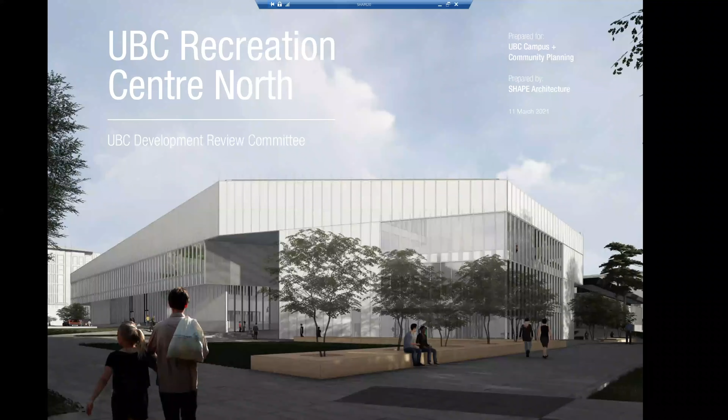Just a quick agenda. We'll touch on the introduction with the project scope, and then we'll talk about the urban design conditions that we considered for this project and get into the building design following that.

This project is located at basically the end of Student Union Boulevard, just north of the existing Life building and to the east of the Bosque.

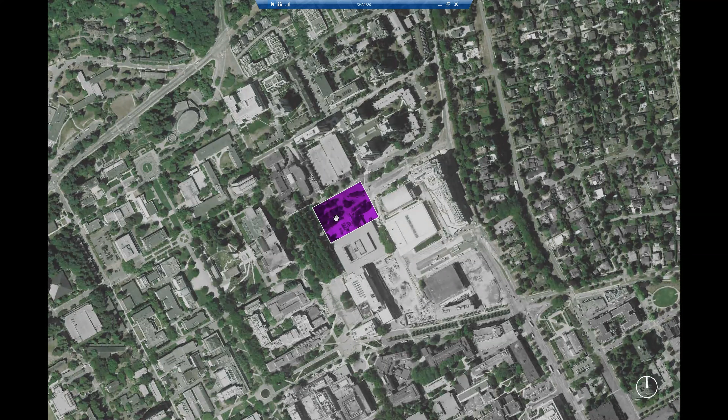The facility itself is about 9,400 square meters, or just over 100,000 square feet. It's largely a fitness facility, with 3 gymnasia, a large fitness component, walking and running track, multi-purpose rooms, change rooms, and some associated administration space.

There is a public realm component that's somewhat related to this project to the north of the building itself. For this project and development permit submission, the scope boundary is basically about 6 meters outside of the building itself, extending all the way to the south to the face of UBC Life.

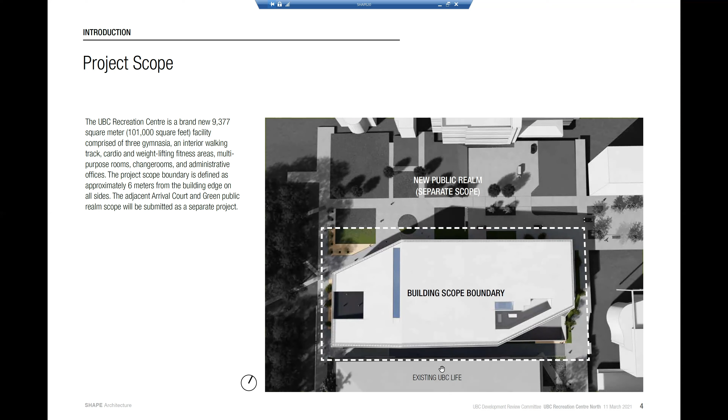Some of the first core principles of the project: we looked at the existing urban context, considering Student Union Boulevard coming down, and there was a predefined street wall created by the Exchange building to the east.

So the massing of the project takes reference from that and continues that street edge down to the public realm area. From the west, we took the west edge of the Life building that faces the Bosque as our western extent.

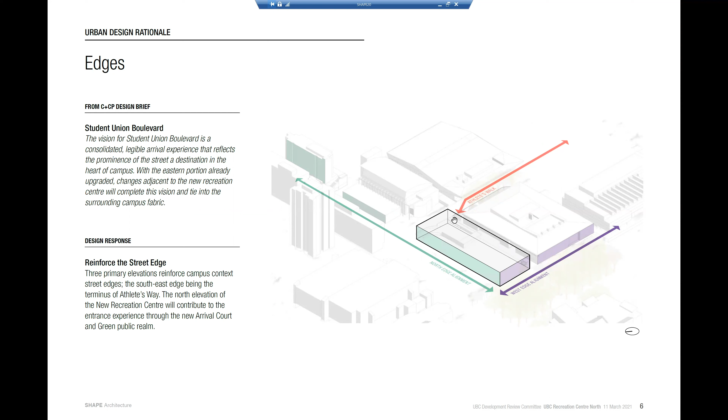This project also considers its interface to Athletes Way along the eastern edge.

Another key thoroughfare and consideration for this project was the existing student services spine that runs through the existing Nest building and the Life building, and currently ends quite abruptly at that northern edge of Life building. This project strives to carry through that alignment into the north public realm area, while mediating the 2 levels of Life that face onto the north edge.

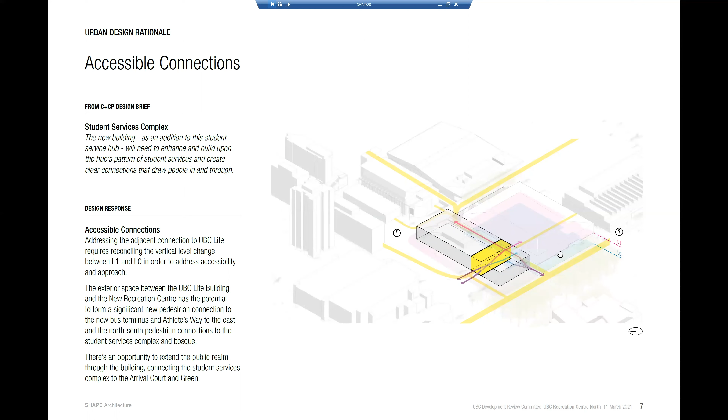With the intent of carrying through that spine all the way to the north, we created a sloped exterior walkway that basically bisects the building mass into two.

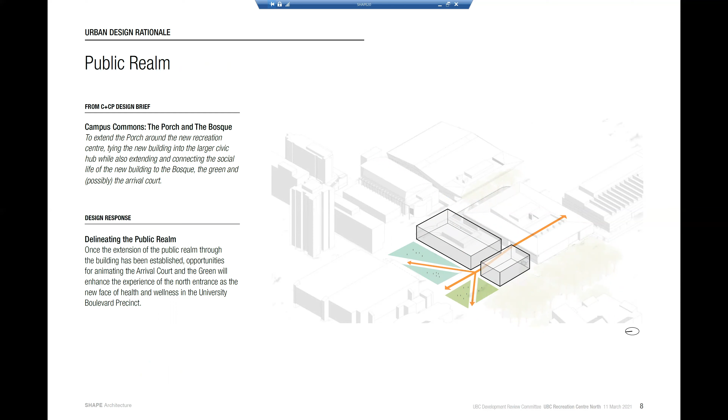Considering the solar access to the northern public realm, pushing down the western edge of the building and in the northwest corner allowed greater access there, as well as considering how the building mass can open up and become more inviting to that Athletes Way interface on the east side.

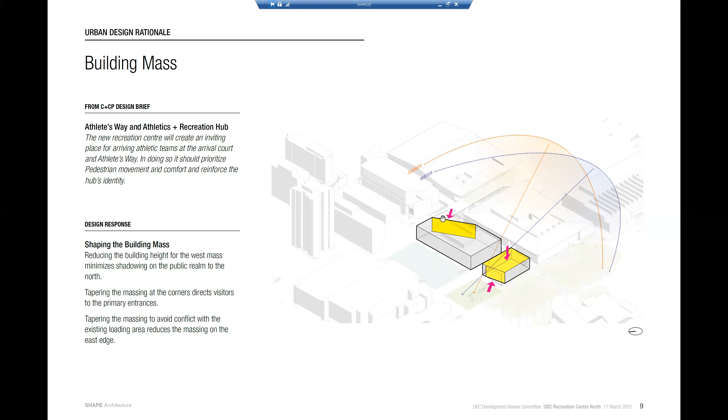And then a shared podium that connects the two, with a main atrium space, change rooms, and the admin space.

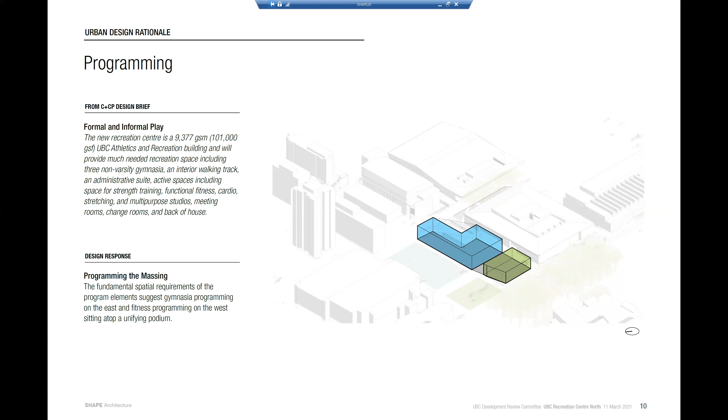We'll go through 3 context sections, starting with the building looking along Student Union Boulevard to the south, showing the existing Exchange building, then the SRC, the Athletes Way connection and its proportions, and then the rec building itself with the Bosque to the west.

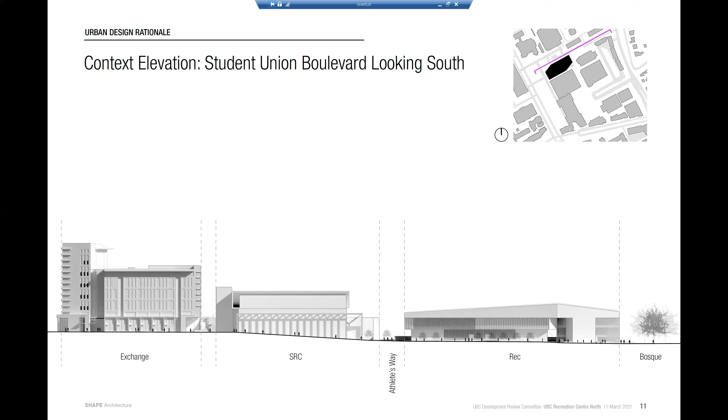This one is looking along Athletes Way to the west. You can see the Nest building and then the Life building, what we're calling the Recreation Gallery, or the space between the existing Life building and UBC Rec.

And then the public realm space to the north. You can see how the buildings really define that exterior public space.

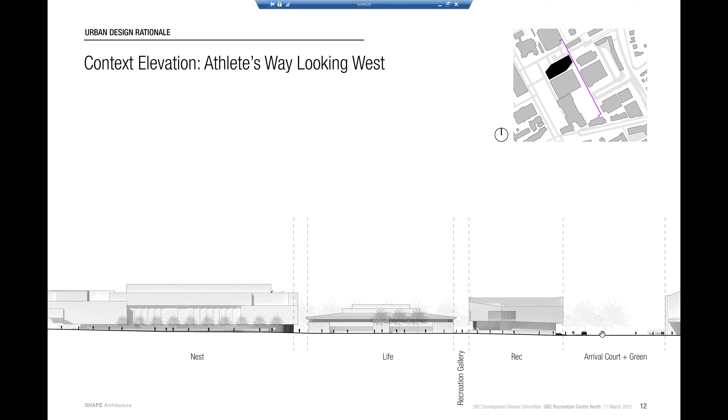This one is looking along the Bosque to the east, with the public realm on the left-hand side, then the rec building with quite a significant amount of glazing facing the Bosque, and then the recreation gallery in that space there.

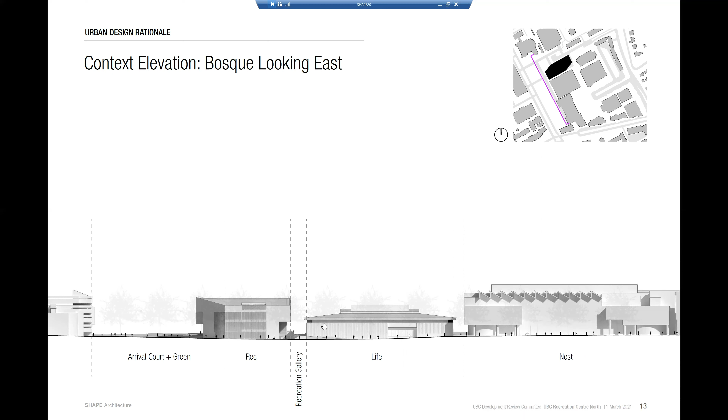Just a site plan. The primary access for the building is the north entrance here.

Pragmatically, that would be the firefighter access with a 15-meter access route from the fire truck access coming around in the roundabout arrival court area, and then extending into the public realm area in an inconspicuous sort of way. It's not really meant to be a prominent feature, but it will be there functionally.

Just a quick note that the existing Life Building firefighter access is currently on the north side of the Life Building, and we're proposing to move that to the east side, with fire truck access along Athletes Way between the rec building, the loading bay, and the student rec center.

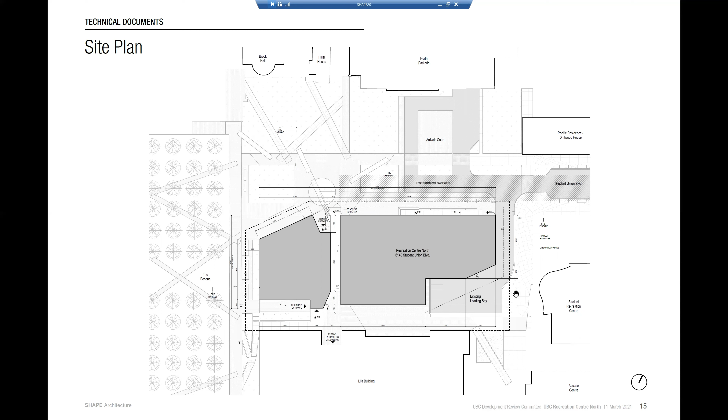So the building height and massing. The top one is an elevation of the north facade that faces the public realm, and then a section running east-west, showing the gymnasia volumes on the left-hand side, the public walkway in the center, and the fitness space to the right-hand side, or the west side.

There was a deliberate forming to the height of the building as it changes from east to west, creating a bit of a foreshortened perspective condition to reduce the perceived height of the building.

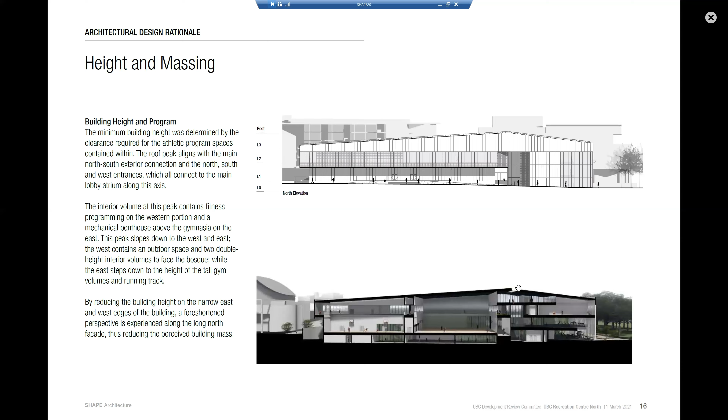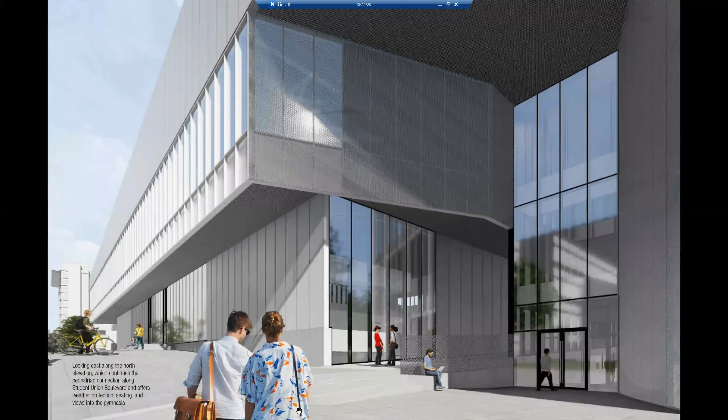This is just a view of the north entrance. We'll show a few renders here around the building, showing the various conditions. This is the public exterior walkway that connects north-south, sloped down to the north public realm. The north entrance here to the right-hand side with that public walkway, and the gyms in the center with the running track above.

And then from level 1 of Life, there's really no accessible connection to that north public area currently. So this building really strived to make those connections through the building, with the building, to that public realm to the north.

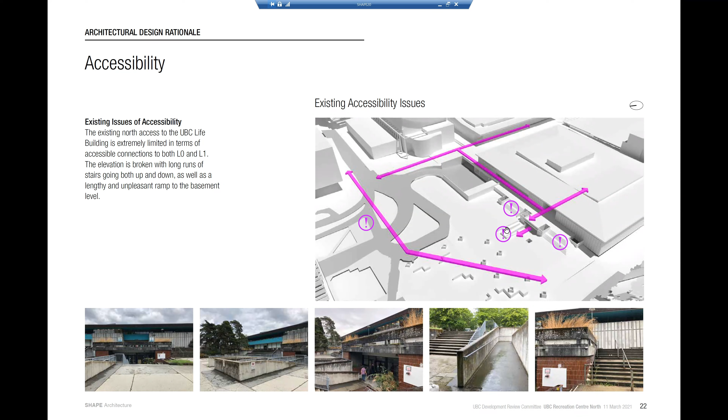So this diagram basically shows that. That exterior walkway condition slopes down at a grade of less than 1 to 20, so less than 5%, so not actually considered a ramp, avoiding all handrails, etc., but sloping down to the north public realm area.

A new entrance from the west, which has a shared vestibule that connects into level 0 of Life and level 0 of Rec. And then also that new west connection from the level 1 Life concourse exterior down to the level of the Bosque on the west.

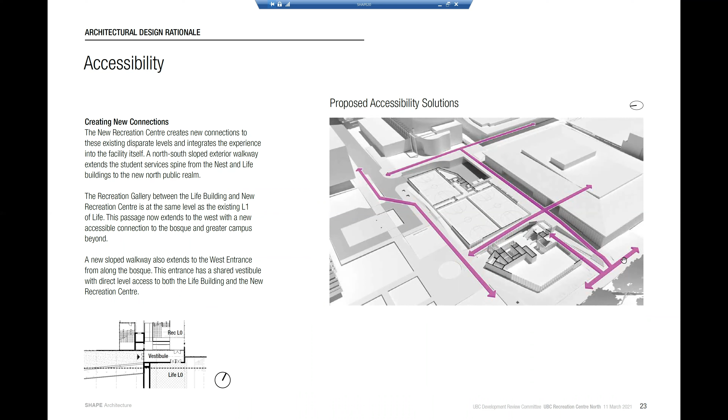So like I've said, the main entrances - there's one on the north, basically directly from the plaza, with a slope down to that entrance. Then an entrance on the south, which is at level 1 of Life and this building, and then a new west connection.

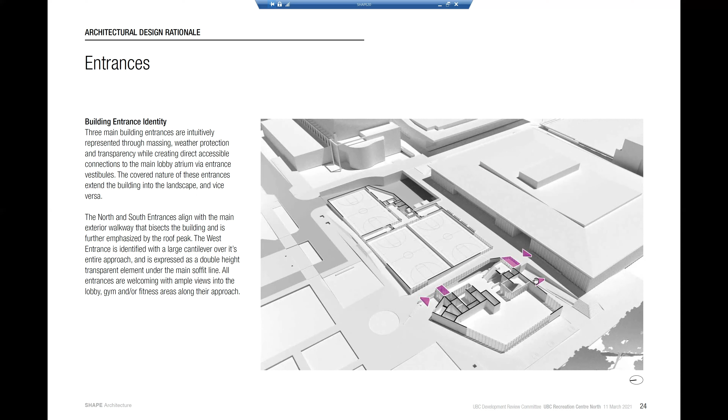Just 3 views of those: on the left-hand side, the new north entrance; the new west entrance on the upper right; and the south entrance on the bottom right.

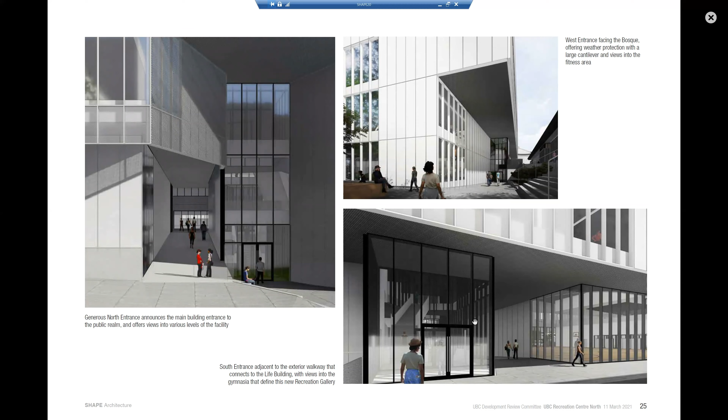So just quickly to walk you through the plans. This is level 0, what we're considering the lower level, and the yellow here aligns with the same level as UBC Life. There's a fitness component on the left-hand side, which is behind control, so you have to walk through gates to get to that.

And then on the right-hand side are the multi-purpose rooms, 2 of those, the change room component, women's and men's, and then back of house on the far right-hand side, which interfaces with the existing loading bay that services the Nest building, as well as the Life building.

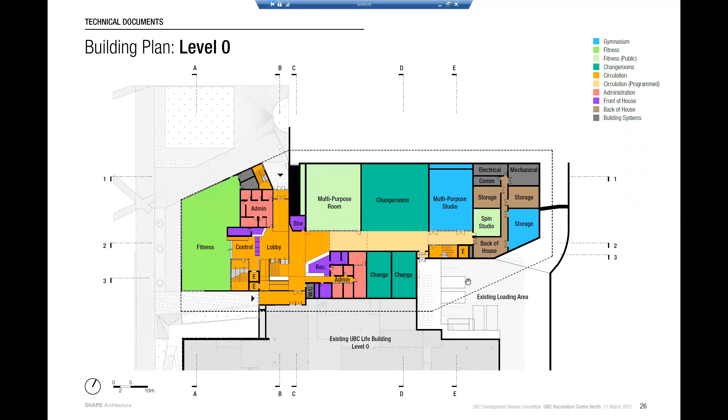And up to level 1. This level shows, this is basically at the level of the existing Life concourse, which slopes down to the north with that exterior walkway. You can see the entrance on the south entrance, to a landing with an elevator that can take you down to level 0, as well as stairs that go down to level 0, and a stair that goes up to level 2, which is the walking track.

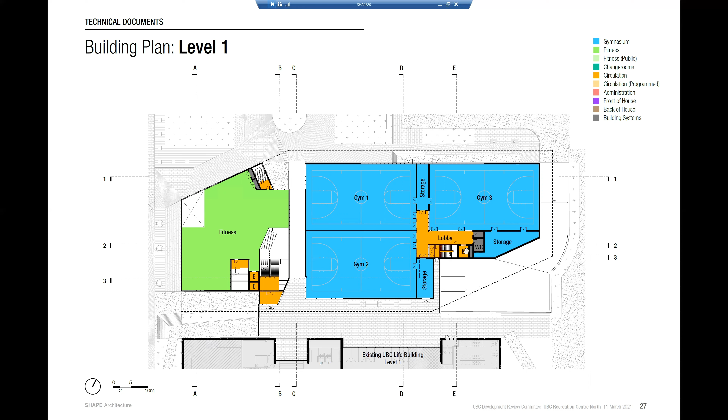And just quickly here, on the right-hand side, a gym lobby that services all 3 gymnasia with an elevator and stairs to access that, and fitness on the left-hand side.

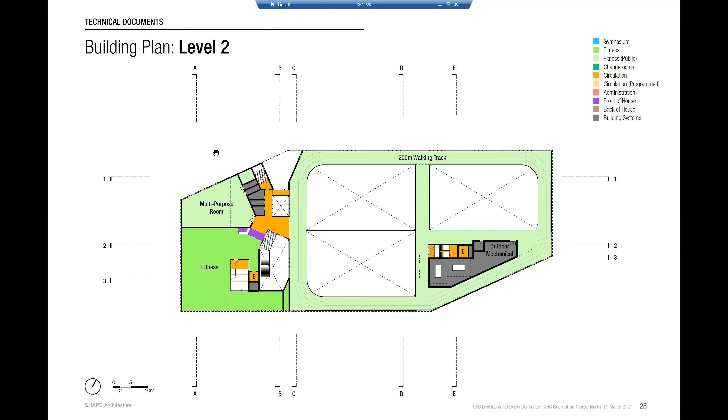This level 2, so a 200-meter walking track wrapping around the gymnasia with exterior mechanical there. The stair and elevator continue to carry up, and then that stair from the south entrance carries up to fitness and another multi-purpose room that faces out to the north Bosque and public realm area.

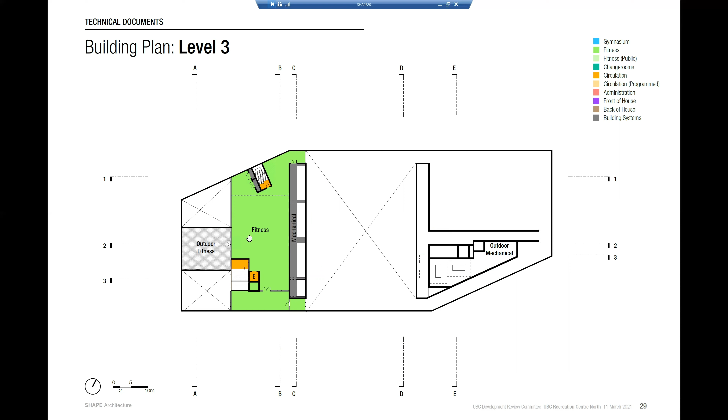And then finally, level 3 on the west side is more fitness space, some mechanical, and a component of exterior fitness space.

Okay, so the public realm, or the public spaces of the building, are basically able to be accessed by anyone. They're not behind control. So this was the running track space, the gymnasia, as well as the complete lobby atrium space, shown in magenta or pink here.

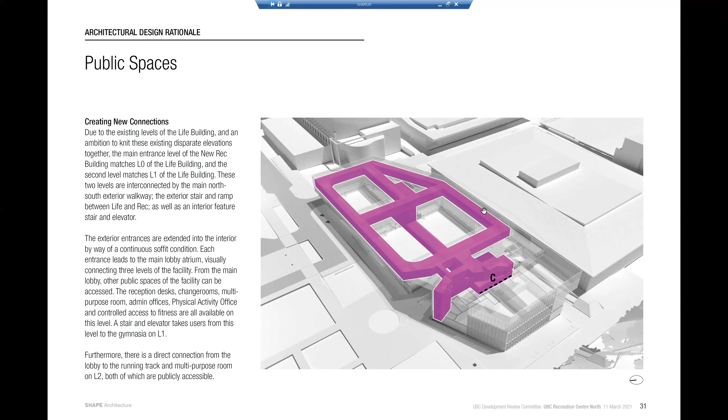So this is a view from the south entrance. Just as you come through the vestibule, you can look on the left-hand side, the stair going up to the running track level, and then the stair going down on the right-hand side to the main lobby space. So there is this kind of main, basically 3-story lobby atrium that provides views to all the different levels and program, as well as, on the right-hand side, views from the exterior walkway looking down into that space. So lots of visual connections throughout the project.

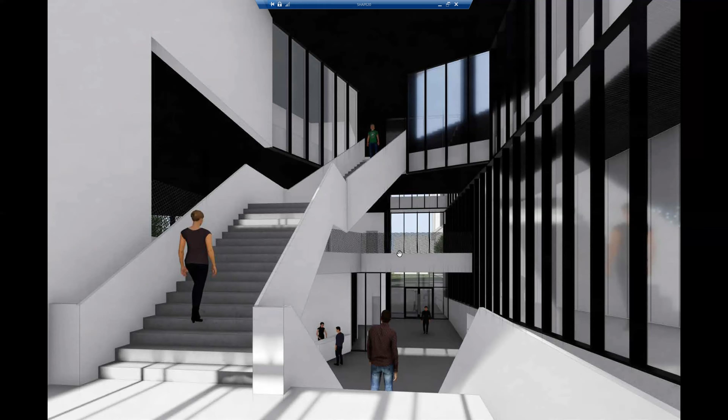We tried to strategically place glazing, particularly on the ground floor level, to not only provide connections from the exterior looking in and creating a relationship to the fitness and gymnasia components there, but also views out from the facility to the public realm to create that passive surveillance and address some of the CPTED issues around the site. Strategically placing those to ensure that most areas are covered with that visible connection.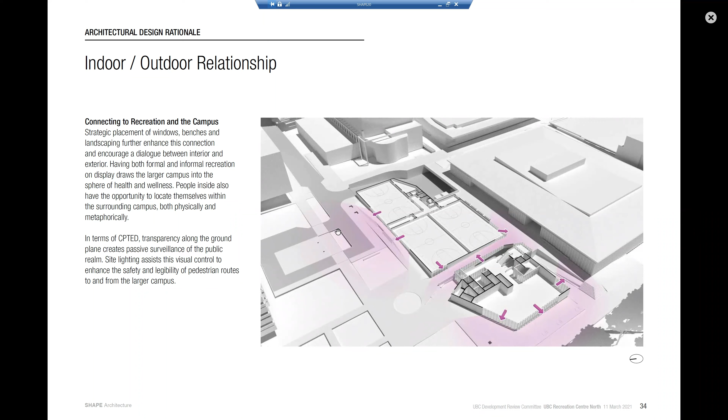Just one example of that is looking from level 0 of the fitness space to the northwest out to the Bosque. And that's one area we've used a double height space to really reinforce that connection to the exterior.

Another key idea was utilizing the overhang or cantilever of the running track to provide weather protection, continuous weather protection along the full north edge and on the south edge. And then also utilizing a portion of the fitness space to cantilever over the west entrance to provide weather protection there and create kind of open, inviting massing for that entrance.

And just a view of that along the north entrance with that covered area. And the north entrance as well being quite generously covered for weather protection.

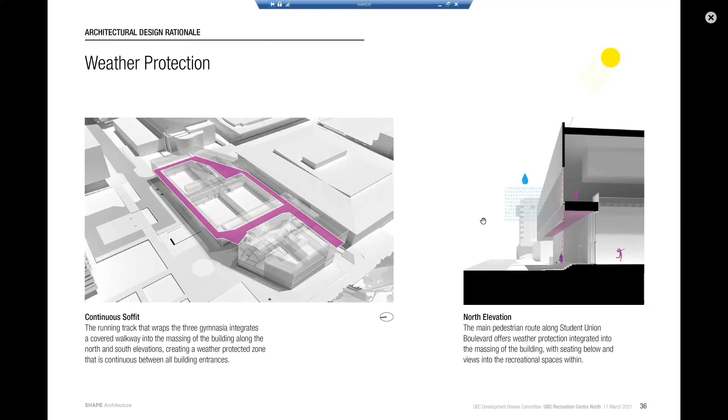And then considering solar access, both to the recreation gallery, the space between life and rec, we really carefully studied the proportion of that space, the dimensions across, as well as the materiality of the cladding in that area, and a number of other things we'll touch on a little later.

And then considering the building mass and how it shadows the north public realm area. So really shaping that mass, pushing back that northwest corner, as well as down to reduce the height on that side, and allow maximal sun to the public realm area, this area here that faces the Bosque.

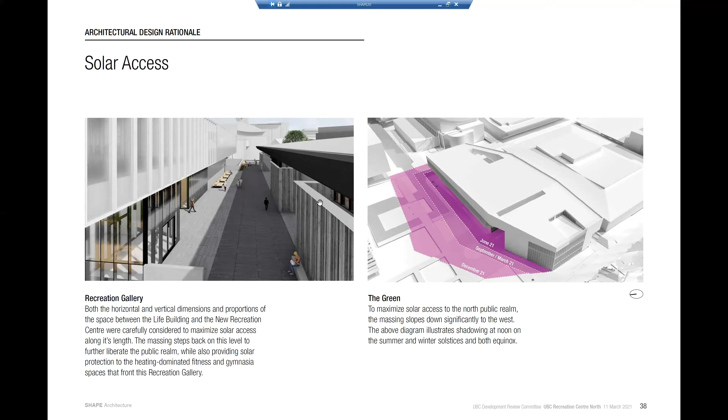Yeah, so a little bit more about that space between. I think we really felt that was a very important area to understand and study. We're interfacing the UBC Life North face. And so considering the materiality of that building, transparency of that building, as well as our building, this building, the proportion of that space along its entire length.

So looking at, for example, here, 4 different sections along it. This one on the upper left-hand side showing the interface to the loading bay below and the running track above, and the proportion of that walkway there, which we'll touch on later as well.

And then on the upper right-hand side showing the interface of the alignment of the entrance to UBC Life with the exterior walkway and how the proportion of that space works. On the bottom left, showing the interface into the gymnasia and views there and creating those connections. And then on the bottom right, showing that entrance vestibule, south entrance vestibule, and the stair going both up and down and the connections there.

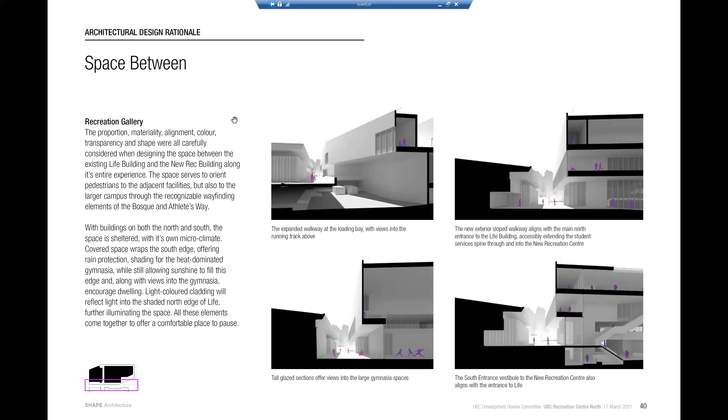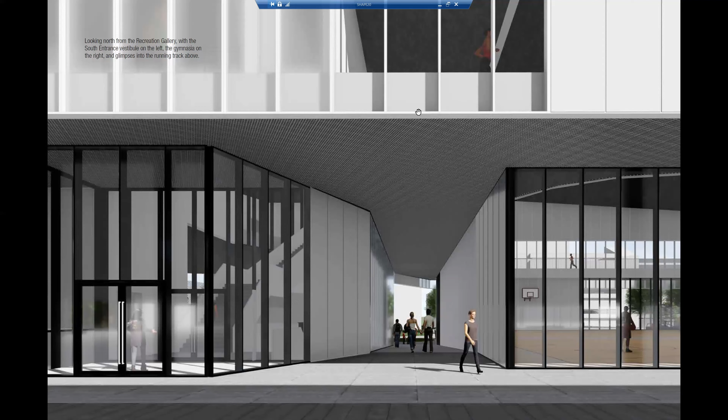Yeah, so this view is showing that. I think this shows the soffit, and we studied a number of different material colors and materiality itself in this area, both the soffit and the cladding. We've developed it a little further to reinforce this interface to the building at the lower level—those areas now becoming much more light, bright and luminous—and then the upper area becoming a little darker to reinforce that concept with some contrast. We'll show some images later that speak to that.

One other area that I think still requires further study is the west edge, the entrance, and the ramp up to the level 1 concourse. Existing photos shown on the left show the current condition, and the following render—sorry, a bit of lag—there we go.

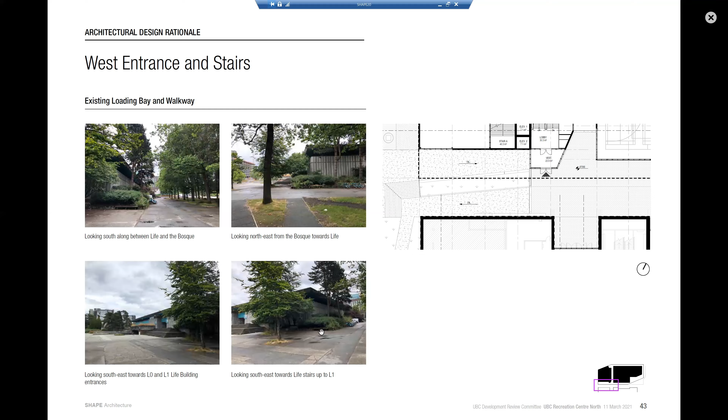So this west entrance—just understanding how this accessible connection would work, sloping down to the bosque level and then further sloping down into the west entrance. This was something UDP touched on, where further investigation and study is going to be required.

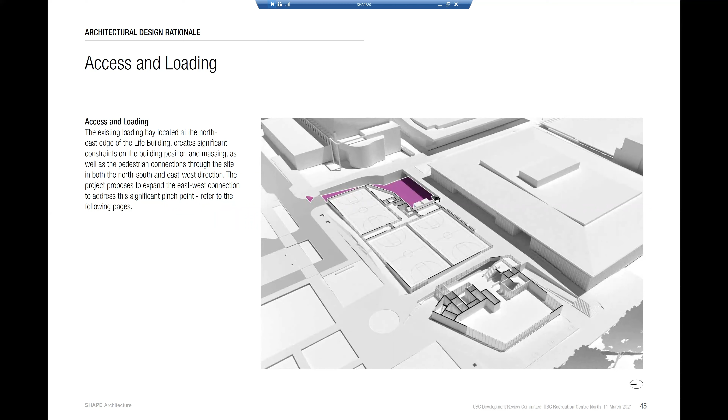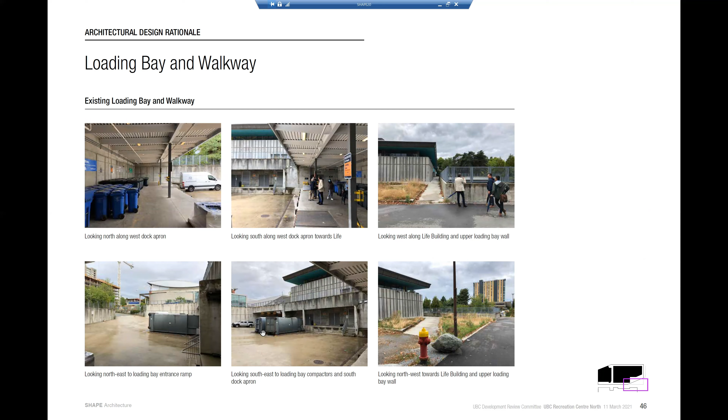Looking at that upper walkway area, on the left-hand side you'll see the existing condition with the new building there, and how narrow that walkway is between the retaining wall down to the loading area and the life building face, where there are exit doors coming from a large exit stair shown there.

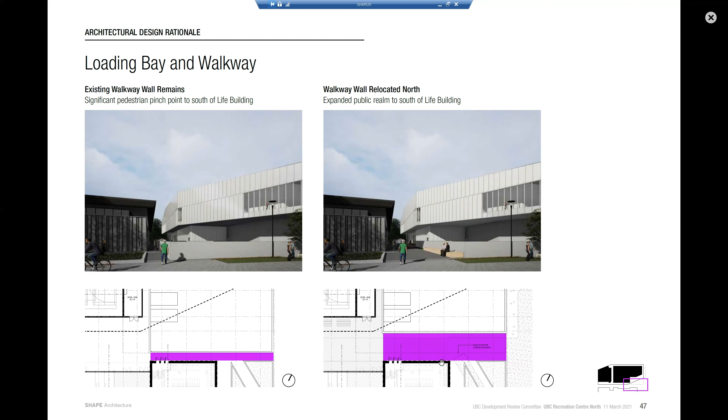And then the proposed condition on the right-hand side really widens that and reinforces and encourages that connection from Athletes Way to the recreation gallery. This image again shows that connection and how important it is to really open that up and create an inviting connection there, east to west.

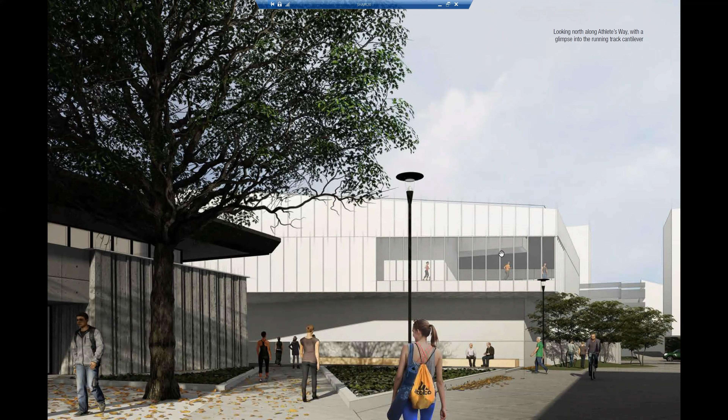Then briefly touching on materiality—given the scale of the building, we carefully considered not only the color of the cladding but also the module, both the transparent element and the solid element, as you can see here.

We also chose to introduce an in-between materiality where there is some transparency or translucency—you may not get a full view through, but light would filter through in a more dappled way, with an implied occupation behind that.

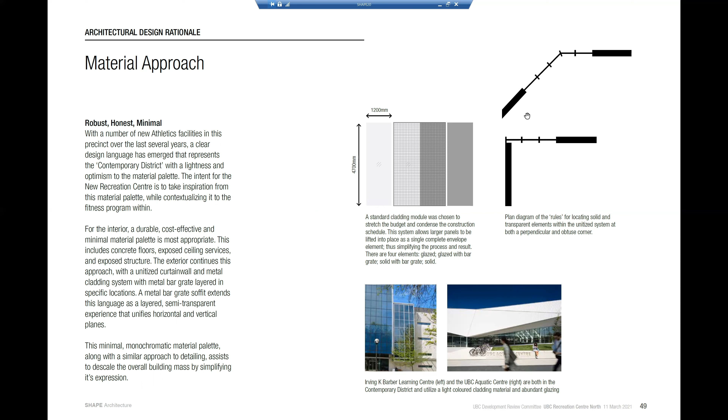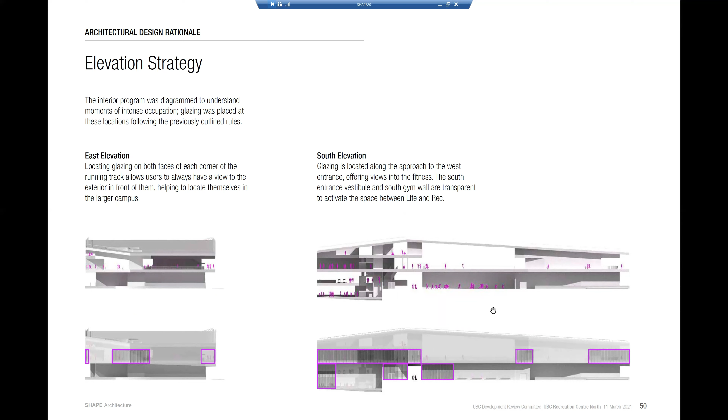The right diagram shows the concept of how we treat corners and transparency, understanding the interior program and where there are moments of intensity, and where glazing may want to be positioned for maximum effect for both interior and exterior viewers and occupants. We then applied the rules we previously created around the building on the east and south elevations.

And then one final view in the Recreation Gallery—this is one area where that materiality is really important, with the penetration of sunlight down in there, but also reflecting it back to create as luminous a space as possible in this area.

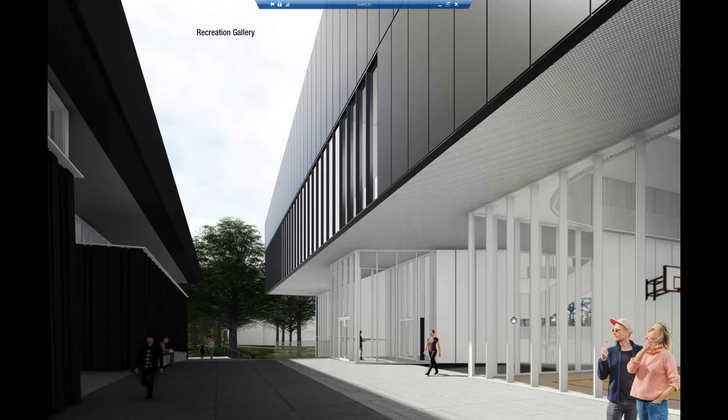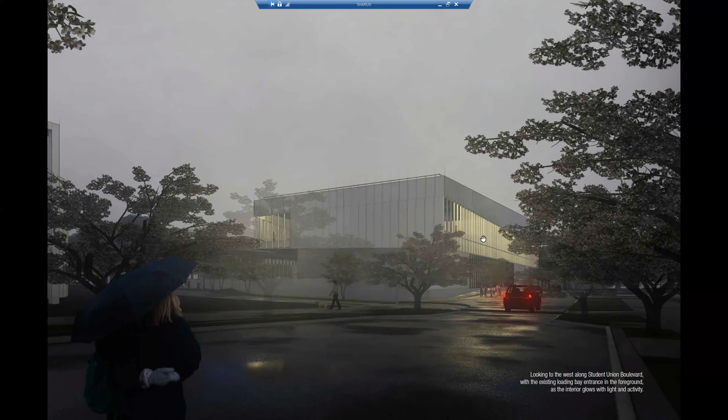And then a couple of final views looking from along Student Union Boulevard to the west—a nighttime view to highlight that concept of this glowing lantern, particularly on a dark day, which seems to be behind us right now.